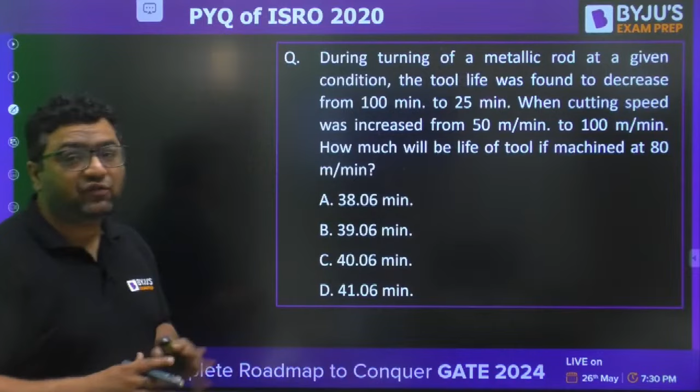Okay, moving further. So guys, we will be starting from this question. We are having all the questions of last year's ISRO paper. The very first question in front of you is from production. I will be taking care of theory of machines, machine design, production, all these subjects. Similarly, other faculties will be coming for other subjects, and the entire paper will be covered. So guys, let us start with the first question.

During turning of a metallic rod at a given condition, the tool life was found to decrease from 100 minutes to 25 minutes. By looking at this word tool life, you must have got an idea - that question is from Taylor's tool life equation. So 100 minutes to 25 minutes is the reduction when cutting speed is increased from 50 to 100 meter per minute. And they are asking how much will be the life of the tool at 80 meter per minute. By looking at the question, you must have an idea that it is the lower level of GATE questions.

Yes, so guys, this is the type of question which is coming in ISRO. And if you see the ISRO paper, this is the highest level of question which they have asked in production. Okay, yes, so very good.

I am giving you the formula V*T to the power n equals constant - this is Taylor's tool life equation. So as given, 100 minutes to 25 minutes, you can say T1 is 100 minutes, T2 is 25 minutes, and velocity V1 is given as 50 meter per minute, V2 as 100 meter per minute. So this data has been given to you. You can apply V1*T1 to the power n equals V2*T2 to the power n. From here you can find out the value of n.

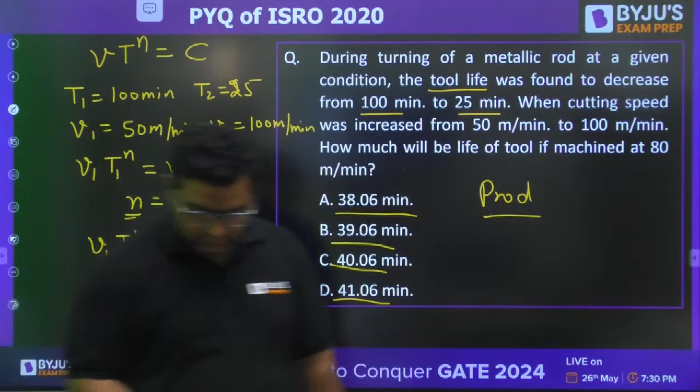Parth is saying the answer is going to be A. Okay, what about others? First tell me the value of n. Okay, now Parth is saying the answer to be B. First tell me what value of n you are getting, guys. Yes Ashrit, Ashok, Pajal word - what would be the answer? Guys, quickly tell me, quickly, I am waiting for your answer.

Very good, Parth. The value of n will be coming out to be 0.5. So when you solve, tool life will be coming out to be 39.06 minutes. So the answer for this question is going to be B.

Very good, guys. Moving to the next question. Very good, Prandtl word. So the answer will be B for this question.

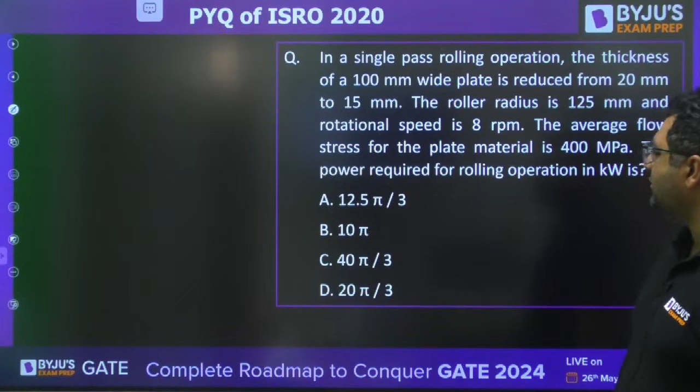So guys, there are some numericals, but majority of the questions are theoretical as well. This is a question from rolling, and this is also once again a question from production technology.

You can see the question: in a single pass rolling operation, the thickness of a 100 mm wide plate is reduced from 20 to 15 mm. So you can write H0 as 20 mm and H1, the final thickness, as 15 mm. So you can say delta H, the draft, is 5 mm. Then he is saying the roller radius is 125 mm, so you get to know R as 125 mm.

They have given the rotational speed as 8 RPM. The average flow stress for the plate material is 400 MPa. You need to find out the power.

I feel everybody would be aware that power can be written as torque into omega, and omega is nothing but 2 pi n by 60. Then you need to talk about the torque. And if you remember, torque in case of rolling operation, we have actually two rollers. So first of all, when we need to find out the power, because there are two rollers, generally power is given as 2 times T into omega.

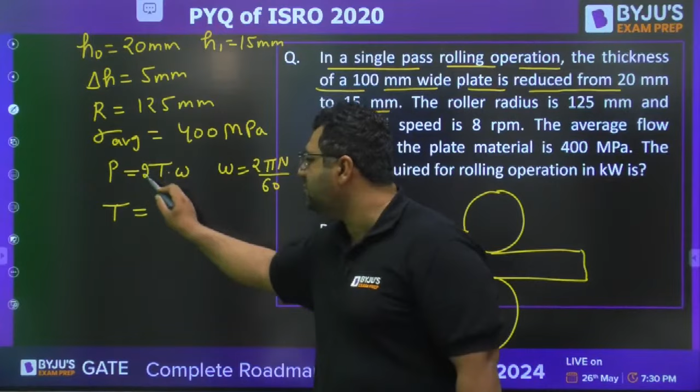So when we are talking about the value of torque, you are aware that if this is the center, the net roll separating force is passing at a distance of A from the center. So that is why we write torque equals F into A. This A is said to be the arm length, given as lambda into L, where L is the square root of R delta H. I feel everybody would be aware of this formula.

And you need to find out now what is the value of F. So when friction is not given, coefficient of friction is not given, you apply a very simple formula for this. Force is given as the average or mean flow stress into width into arc - the arc on which this roll separating force is acting. This is said to be L only. So it is once again B into L. The L formula is there in front of you. You will apply the formula, get F, get T, and then find out the power.

This is how you can solve it. I have given you the formula. Very good, Prandtl word. What will be the answer for this question? Solve it, guys, solve it. I want an answer from all of you. Parth, Prandtl, Ashrit, just solve it.

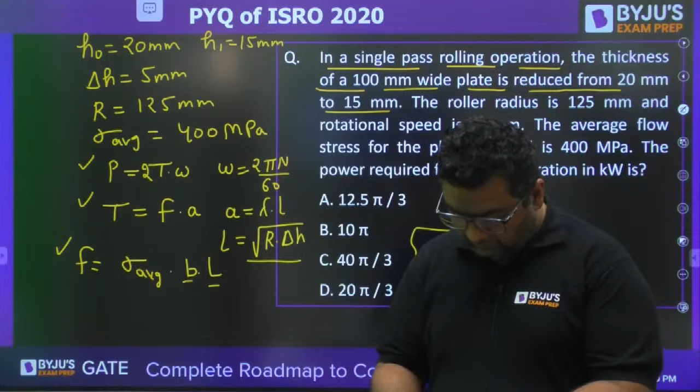So just try to solve it. Try to solve it. Everybody, what would be the answer, guys?

Okay, one by one we can find out. First of all, try to find out this force. You can see the width is given as 100 mm. So average stress is nothing but 400 MPa into width of 100 mm, and L value will be from R delta H. You need to just put these values and you will be getting the answer.

Okay, definitely Parth, calculate it. Actually, not more than 8 to 10 questions are of this type. All other questions are theoretical only. So 8 to 10 questions have this type of calculations.

So whenever you give the exam, try to do these types of questions at the end, which have heavy calculations. Solve the theoretical questions, one-liners, in the initial phase. Whenever you go for the first round of reading the paper, do the easy questions like that. After that, whenever you come to numericals, go for the numericals where you're aware of which formula will be used. And at the end, do those questions where you have lesser idea, or you are going to use some guesswork or intuition. Okay, so this is how you need to approach the paper.

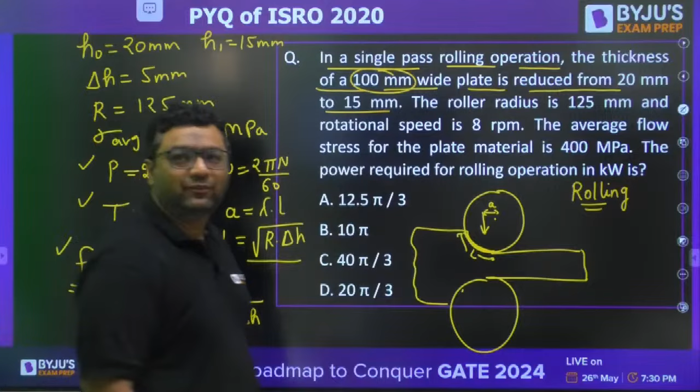Pejal word. Are we trying?

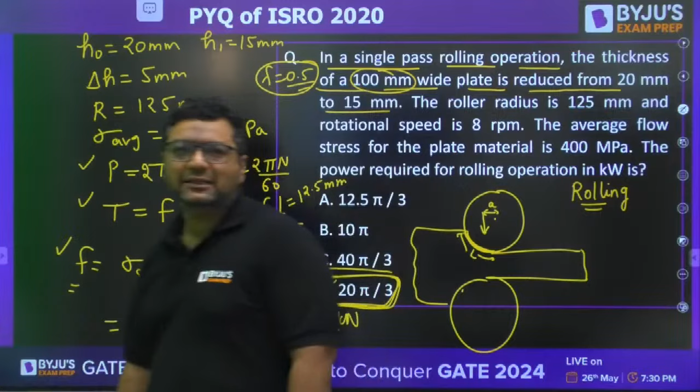Pejal word, okay, everybody is getting 40 pi, then maybe my calculations are wrong. Maybe this, whatever I have written, is the value of t into omega. When you multiply by 2, then you will get 40 pi by 3. Okay, then it's fine, whatever I calculated is t into omega. 40 pi by 3 is fine.

Or have I made it correct? Tell me that. I feel someone is a Dukhi Atma saying I am correct. So the answer is 20 pi by 3. Shall we lock it, guys? Lock it. Yes, D is correct, so 20 pi by 3 will be the right answer.

Moving further, now you can see easy questions are starting. So difficult, lengthy questions are over, and now easy questions are starting.

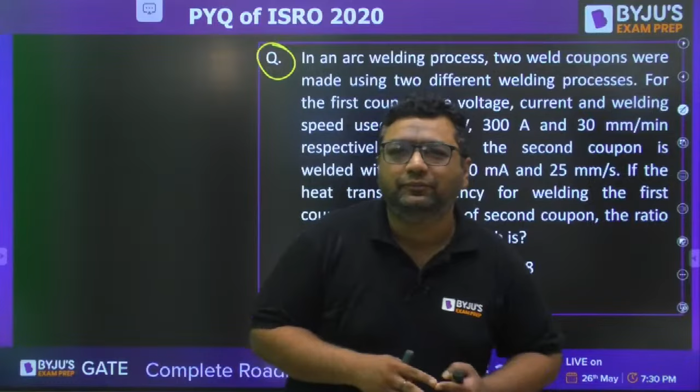Parts, if you remember when we are going for casting, this is a mold, this is the pattern. Whenever you want to take the pattern out, you apply forces using a wooden hammer. Because of this, the sand near the pattern moves away, and then you can take the pattern out very easily. This allowance is called rapping allowance because the cavity size has increased because of that.

Now the next question is from arc welding. In an arc welding process, two weld coupons were made using two different welding processes. For the first coupon, the voltage, current and welding speed are 15 volts, 300 amperes and 30 mm per minute. The second setup has 60 kilovolts, 200 milliamperes and 25 mm per second.

You need to see the units - here it is in minutes, here it is in seconds. If the heat transfer efficiency in the first coupon is half that of the second - so efficiency for welding in the first is half that of the second - you can write efficiency of 1 equals efficiency of 2 divided by 2.

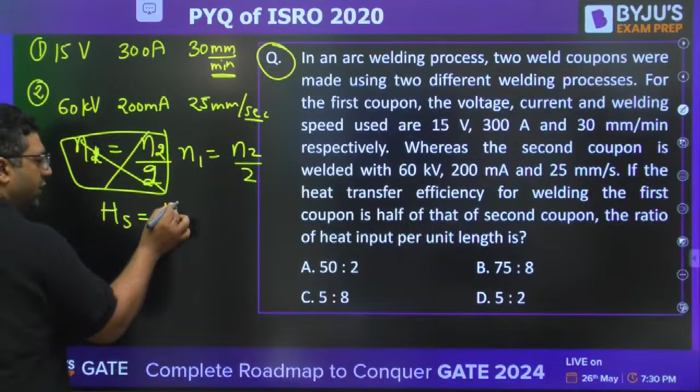Forget about this, I feel you know the formula for heat supply: V into I into efficiency divided by V. This is the formula for joules per meter, the heat supplied in units of joule per meter. So voltages are given, you just need to work it out.

They are asking you to find the ratio of heat input per unit length, so you need to find HS1 by HS2. The formulas are there in front of you. So V1, I1, efficiency 1 by V1, then V2, I2, efficiency 2 by V2.

Before putting in the values, convert this also into mm per second so that you get the right answer. Solve this question, it's very easy in front of you guys. Dukhi Atma, solve this and get the answer. Arnab, I am expecting the right answer from you.

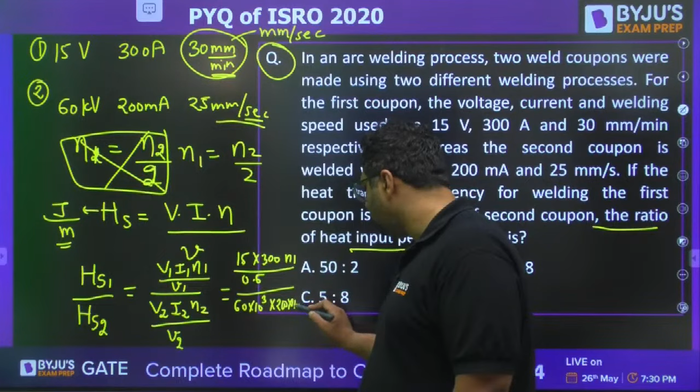V1 is 15, I1 is 300, efficiency of 1 is efficiency of 2 by 2 - keep it as efficiency of 1. V1 is 30 mm per minute, we will divide by 60, it will be 0.5, divided by - second data is 60 into 10 to the power 3, then 200 into 10 to the power minus 3.

Efficiency of 2 is 2 times efficiency of 1, divided by 25. Pajan and Parth are saying D will be the answer.

Yes, Dukhi Atma, what is the answer? Tell me. Parth and Pajan, have you converted that into mm per second? When you do that, 30 divided by 60 gives 0.5 mm per second. Have you done this? Please tell me, please confirm yaar, at least be interactive. If you have made some mistake, we will rectify this.

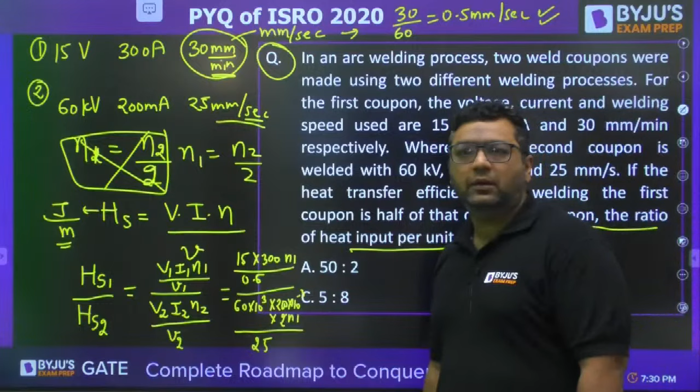Okay, but the answer is what Dukhi Atma is saying - B, this is the right answer. And this is from the ISRO keys, I have also solved it, and 75:8 is the right answer. So Parth and Pejal, you have made some calculation mistake, but don't worry, this is not the final paper, this is the place where we can improve. You need to see where you are making the mistake, so in calculation you need to work more.

As I said, these types of questions are very less in number. To make it more interesting, I have kept these questions first. Otherwise, majority are theory questions.

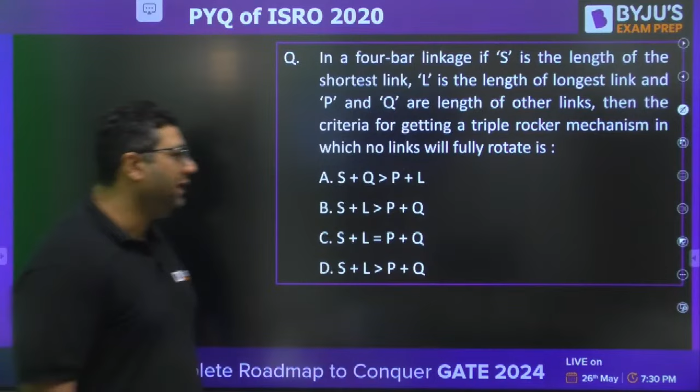This is a 4-bar linkage theory of machines question, based on Grashof's law. Let us see how many of you give the right answer. I already told you, this is a very important law, it comes every year in the paper. But before you answer, notice they are talking about triple rocker or double rocker. So whenever you have double or triple rocker, what should be the condition you must be aware of?

Very good, yes. What will be the answer for this? Mind it, they are asking about triple rocker, but you can consider it as double rocker. For double rocker, what would be the answer?

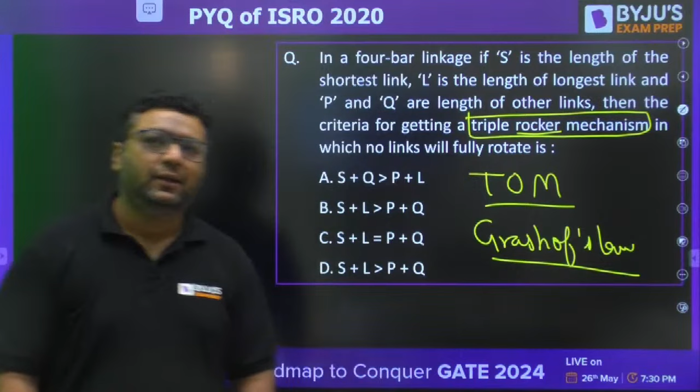Very good. So the answer will be this, because for double rocker or triple rocker, the Grashof law condition shall not be satisfied. Grashof's law says that if S plus L is less than or equal to P plus Q, you will get at least one crank. When you get one crank, the mechanism cannot be double or triple rocker. So to get double or triple rocker, we need that law to not be satisfied. So answer B is the correct one. Here the law is satisfied, so it's wrong. Here the things are not written in the proper way.

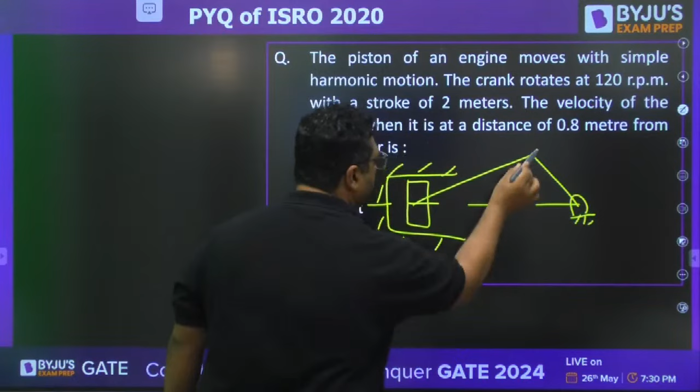Moving further, the next question is from kinematic analysis of single slider crank mechanism. The piston of an engine moves with simple harmonic motion. This is a cylinder, this is a piston, with connecting rod and crank given. They are saying that the crank rotates at 120 RPM.

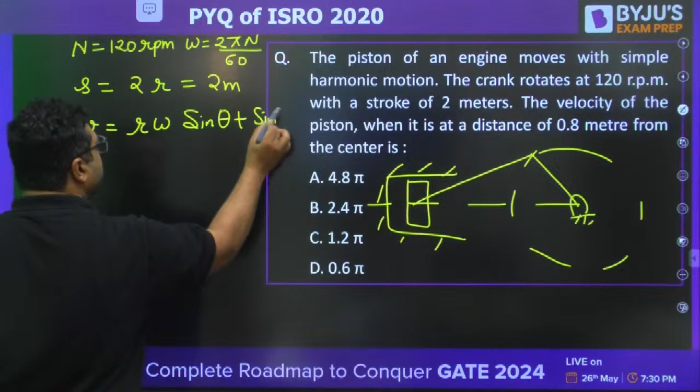N is 120 RPM, from that you can find out omega as 2 pi N by 60. Then, with a stroke of 2 meters, since they have already mentioned the stroke of 2 meters, stroke can also be written as 2 times the radius of crank, which is given as 2 meters. So radius will be 1 meter. The velocity of the piston is r omega sine theta plus sine 2 theta upon 2n, if you remember.

But they have not mentioned L and R directly, they have said it is at a distance of 0.8 meter from the center. So they have not mentioned anything about L and R. R we know is 1 meter, but L is not known to us. So without that we cannot move ahead because n is not known. For such a case we will say n is very, very large, so this term will be neglected. So we just need to find out theta now.

Now, as n is very, very large, when you write the formula for displacement, if this is the extreme position, and this is the movement of piston X, the formula is X equals R into 1 minus cos theta, plus n minus square root of n square minus sine square theta. Since n is very, very big, in place of n square, sine square theta will be ignored and n will get cancelled out, so this entire term becomes 0. So you get the answer as X equals R into 1 minus cos theta.

And as they have said 0.8 meter from the center, you know from here to here the total is 2 meter stroke length. Then if we talk from the center, this should be 1 meter. And they have given it as 0.8 meter from the center.

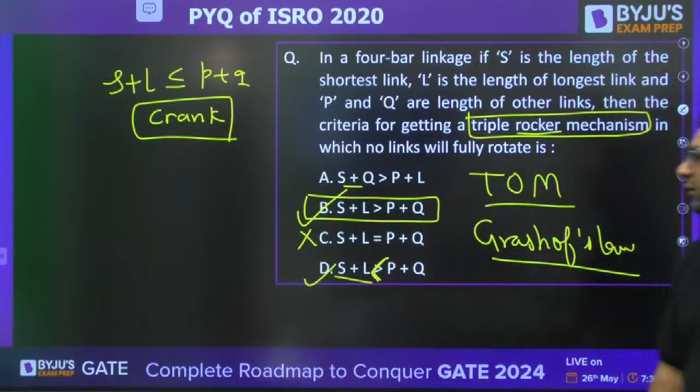Dukhi Atma, actually that is a misprint. B will be the right answer because in ISRO it is MCQ only. So D was a misprint, don't worry. In the previous question, D and B both are same, so you can say both are correct. It was a misprint actually, here a less than sign will come. Then it will become wrong. Solve this question, guys.

Yes, Pagel word, are you giving the answer for this question as A? Solve it properly, guys. I have seen in calculation type of questions, you guys are not giving the right answers.

Dukhi Atma, be fast. 4.8 pi, 2.4 pi, 1.2 pi, what will be the answer?

Arnab, where are you? Next question is from Coriolis component. Tell me the value of cos theta.

Ha, Parth, but note it. The point is, if you are able to make 70-80% of questions correctly, no need to go for any such question where you have doubt. Can you tell me from here what is the value of cos theta?

Cos theta, this is R is 1 meter, 1 minus cos theta. What will be cos theta? Cos theta will be... very good, Dukhi Atma has given the right answer.

Yes, 2.4 pi will be the right one. Pagel word, once again you have made the mistake. You can see it, 0.2 is R into 1 minus cos theta. 2 times of R is 2 meters. So R will be 1 meter. So from here you will be getting the value of cos theta as, you can say 1 minus 0.2. So you will be getting from here cos theta is 0.8.

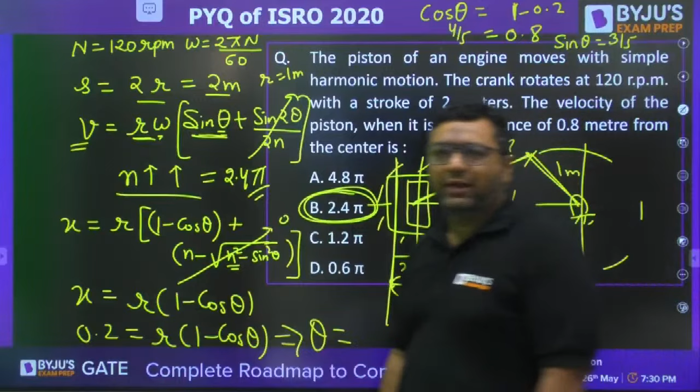B is correct. Very good, Ashrit. Very good, Ashrit. So, okay, sin theta is 0.6.

I feel I have done it correct. Yes, cos theta is 4 by 5, sin theta is 3 by 5.

Answer is 2.4 pi. Arey bhai, this is 0.2 na? X is 0.2. R is 1 meter. 1 minus cos theta. When cos theta will be going there, you will be getting 1 minus 0.2. Okay, so I have written it correct only. B is the right answer.

Very good, Dukhi Atma. Now you got it. Pagel, now you got it, your mistake. Very good. So Parth, you guys are getting one more chance.

A block slides outward. I am making the figure for this. This is the block. A block sliding outward on a link at a uniform rate of 30 meter per second, while the link is rotating at a constant angular velocity of 50 radian per second. They are asking you Coriolis component.

I feel everybody would be remembering the formula. Coriolis component is 2V omega. Solve it and get the answer, guys.

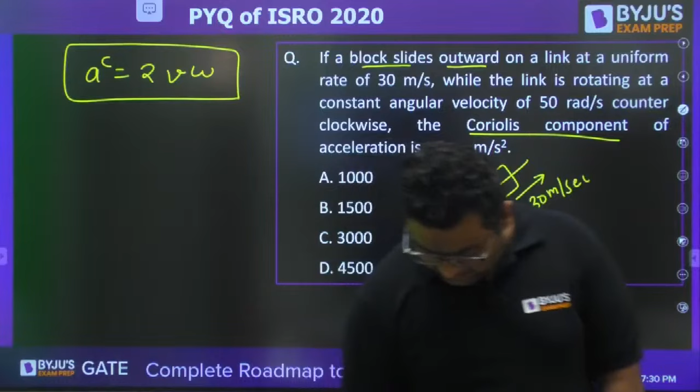Parth is saying C. Pagel word is saying C. Very good. So that's what I said.

If some difficult questions are there, some very easy are also there. So when you are going to make the paper, the first time you will make all easy questions which you are answering just by looking at it. Then you will go for those numericals which you know, which are very small, like this type of numerical. At the end you will go for the numericals like you have seen last one, like you have seen welding numerical, like you have seen forming numerical.

Very good. Everybody is giving the correct answer here. C is the answer for this. When you will put it, you will get 3000 meter per second square. Because omega is directly given as 50, velocity is 30, so answer will be 3000.

Moving to the next question, very easy one. Look at it.

Every question is not difficult and every question carries the same marks. This question will give you the same marks as the previous one. So why choose the difficult question and make our journey harder? Answer this, I feel everybody will give the right answer.

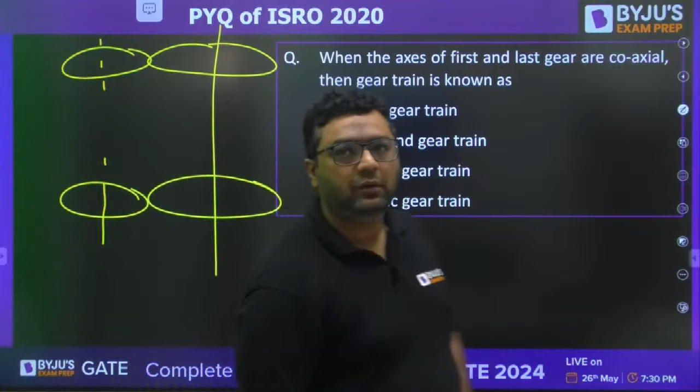When the axis of the first and last gear are coaxial, this is the axis of the first gear and this is the axis of the last gear. When the axes become the same, which gear train is this? Yes, it is a reverted gear train.

Wonderful, guys, wonderful. Ashrit, got it or not? Arnab, got it or not? Parth, very good, very good.

Moving to the next question, guys. This question is from Gyroscope. You've seen many questions like this in theory of machines. You know for gyroscope the couple is I omega omega p, and you need to find the value of omega p. They have given omega as 20, torque as 100 Newton meter meaning couple is 100 Newton meter, and I value as 1 kg meter square. So just find omega p using the simple formula. They are not even asking about direction. What will be the answer to this question, guys?

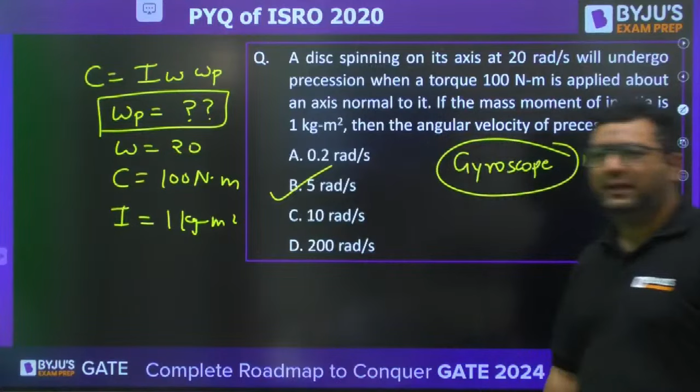Very good, very good. All of you in one word, B is the answer. Very good, Pejal, Dukhi Atma, Parth Patel. B is the right answer. Moving further.

This is once again from theory of machines. Which of the following mechanisms provides intermittent rotary motion? Intermittent. Yes, for intermittent motion, only one name is famous. Which mechanism is used for intermittent motion? Theory of machines, lower pair mechanisms.

Very good, Dukhi Atma. What about others? Ocean, very good. Pejal, very good. This is Geneva mechanism. This question has been asked in engineering services many times. I told you that these types of ESE questions are getting repeated in ISRO, that's why I said previous year questions of ESE are important.

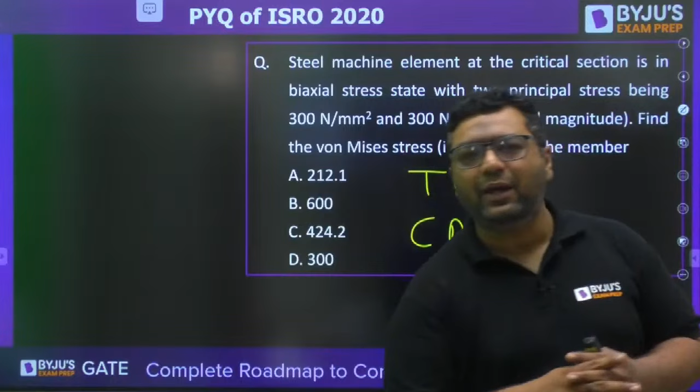Steel machine element at the critical section is in biaxial state of stress. Biaxial state of stress means this: if this is sigma xx and this is sigma yy, with no shear acting, it becomes sigma 1 and sigma 2. He is saying sigma 1 and sigma 2 are 300.

So I feel you are aware of von Mises theory: sigma 1 square plus sigma 2 square minus sigma 1 sigma 2 equals SYT square. So you need to find the value of SYT. Solve it and get the answer. I have given you the formula, this is for von Mises theory.

Theory of failure is a machine design topic. For civil people, theory of failure comes in SOM (strength of materials), but for mechanical people it's in machine design. In reality, it should be in machine design only since it relates to design, but we study it in SOM because it has application with principal stresses.

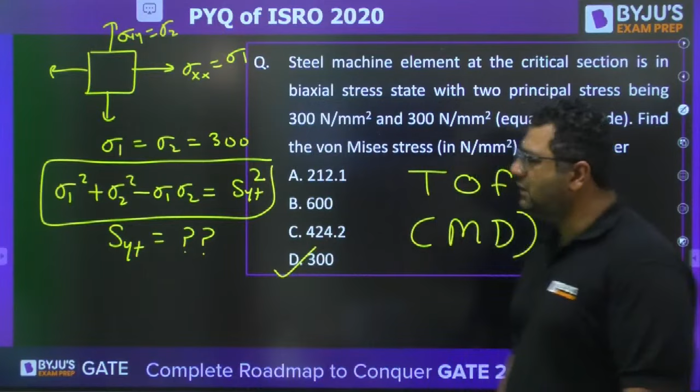Very good, everyone gave the right answer. 300 is correct, because when you put the value 300 squared minus 300 squared, one 300 squared term gets cancelled out. So the answer is 300. Next question is once again from theory of machines.

They are asking about the natural frequency. For that, first find the equivalent stiffness. You know we can also represent it like this: K1 and K2 in series, so that can be written as 1 by K equals 1 by K1 plus 1 by K2. So this K becomes K1 K2 by K1 plus K2.

Now this and this are in parallel. You can find out K equivalent, and omega n will be given as root of K equivalent divided by mass. Solve it and get the answer.

They have mentioned the value K1, K2, K3 as 4, 4 and 8. So they are equals to 4. 4 cross 4 by 4 plus 4. This is K3 is 8. So now, 4 plus 4 is 8, 4 into 4 is 16, 16 by 8 is 2. So now K equivalent is 10, that is 2 plus 8.

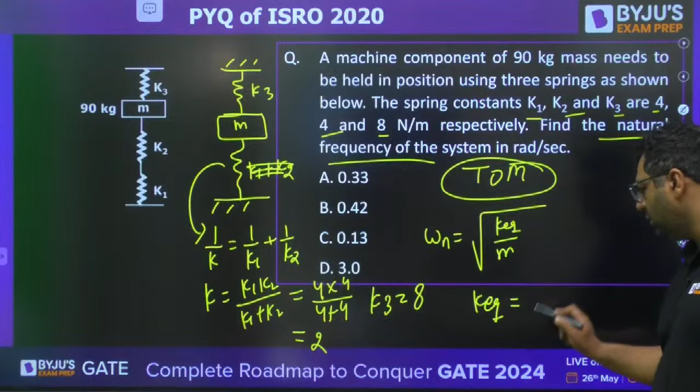Solve it and get the answer, guys. Mass is given as 90 kg. What will be the answer for this?

What will be the answer for this? Very good, very good, very good. 0.33 is correct.

A is the right answer. I feel you have made the mistake. When this is 10, mass is 90, so what will you get here? root of 10 by 90 is 1 by 3, and 1 by 3 is 0.33. Very easy question. Very good, Ocean. Wonderful.

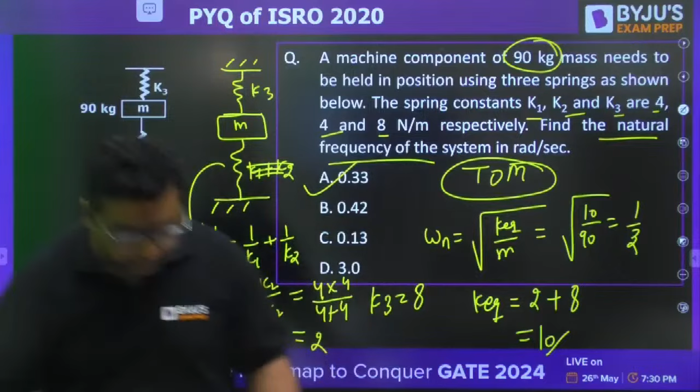Moving further, guys, the next question is this. A metal alloy machine component is subjected to fluctuating tensile stresses from 100 to 200. The material has yield and endurance strength as given. Find out the factor of safety. As they have given the yield strength and endurance.

What is yield? They have mentioned it as 450. Endurance is 200. So whenever they are giving this, we can go for Soderberg criteria, because Soderberg needs these two things. So you know what we can do now?

For Soderberg, sigma mean by SYT, sigma amplitude by SE is equals to 1 by N. You know sigma mean is maximum plus minimum by 2, that is 100 and 200. And sigma amplitude is maximum minus minimum by 2. So maximum is 200, minimum is 100. Just put the value and get the answer, guys.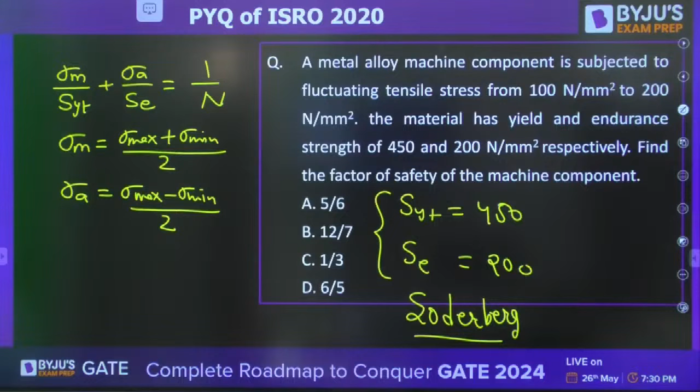Put the value and get the answer, guys. Solve it. Solve it, guys. Yes, Dukhi Atma, what will be the answer?

Okay, Parth is saying 12 by 7. Dukhi Atma is also saying 12 by 7. And I would like to say that 12 by 7 is correct. So the answer for this will be 12 by 7. Maximum plus minimum by 2 is 150. Maximum minus minimum by 2 is 50. Putting the value, you will get 12 by 7.

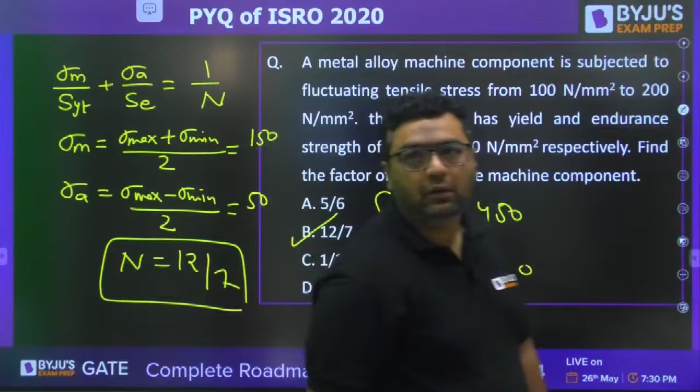Very good, guys. Dear Dukhi Atma, it will be offline. Till now, they have mentioned it to be offline. Okay, ISRO is always taking offline exam, that's why the paper is available.

So a diver of mass 100 kg standing at the tip of a springboard of negligible mass. The natural frequency of the springboard with the diver is 1.6 Hertz. What is the static deflection at the tip of the springboard when the diver is standing at the tip? So the point is, omega n is equals to square root of g by delta.

They have given frequency in Hertz. So 2 pi Fn is equals to g by delta. So delta is unknown, you need to find out delta. This is Rayleigh method of vibrations. This question is from vibration.

Sir, engineering maths is there. Yes, Parth, actually till last year's every year maths is coming, and maths in this paper have 7 questions. Okay. Yes. Solve it, guys.

Solve it, solve it, solve it. Solve this question, guys.

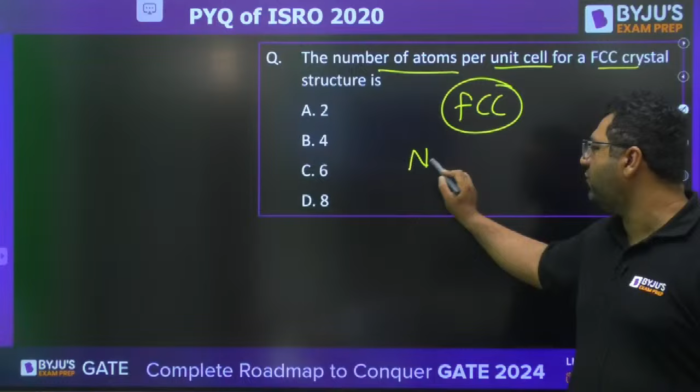Hydrogen bonding. Next, the number of atoms per unit cell for FCC - the average number of atoms. Corner atoms contribute by 8, face centered by 2, body centered by 1. What will be the answer? Very easy question, FCC and BCC we have done in detail.

This is from material science of GATE syllabus. Parth Patel is saying 6. Think and answer, yaar. For FCC: corner atoms 8 by 8, face centered 6 by 2, body centered 0. What will be the answer?

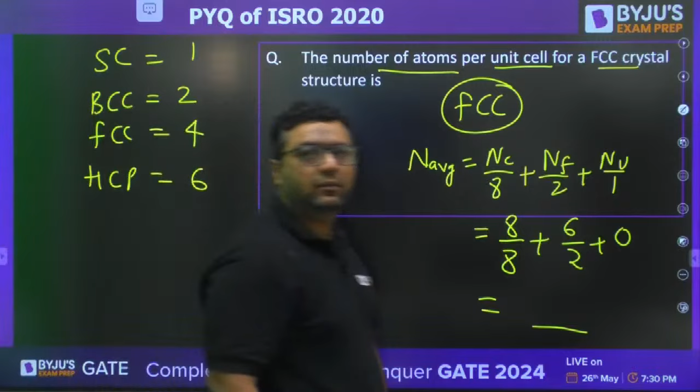Yes, 4. For BCC, the average number of atoms is 2. Simple cubic is 1, FCC is 4, HCP is 6. Okay, moving further, next question.

So they are saying in a 2-component system, the non-compositional variable is only temperature. Okay, so it means you will use the Gibbs phase rule: P plus F equals C plus 1, because only one thing is variable. You need to find out the number of degrees of freedom.

In the case of a single phase, P value is 1, plus F. They have already mentioned it's a two component system, so C plus 1 is 2 plus 1. Find out the degree of freedom - very easy question, Gibbs phase rule.

Dukhi Atma, actually C plus 2 is used when temperature and pressure both are variable, as in thermodynamics. In material science, pressure is constant, atmospheric, so that is why only temperature is unknown. So the formula becomes C plus 1. C plus 2 is in thermodynamics where temperature and pressure are variable; here only temperature is variable.

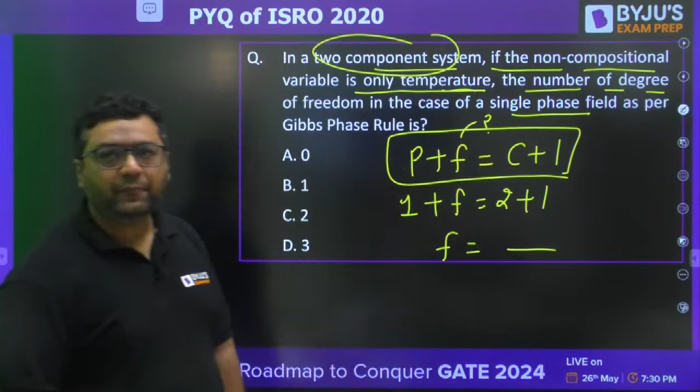Okay, so the answer for this will come out to be 2. So guys, P plus F equals C plus 2, where 2 is for temperature and pressure. But P plus F equals C plus 1 in material science, because here only temperature is variable - pressure is known to us.

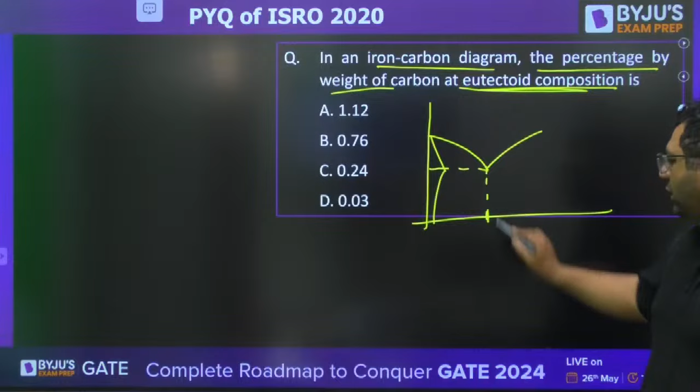Great, moving further. In an iron carbon diagram, the percentage by weight of carbon at the eutectoid composition - if you remember, when we are talking in the steel region, then this is what they are asking. Eutectoid point. Up to 2% is steel.

Tushar is saying B is the answer. Very good, very good, Dukhi Atma. B is the right answer - 0.76. So you can see these are the questions which will make you clear the ISRO exam.

So these type of questions are going to help you. Okay, so not every question needs to be attempted - some are to be left as well. This question is easy to attempt though, very easy question once again from material science.

Out of these phases, which of the following is the hardest: martensite, pearlite, bainite and spheroidite?

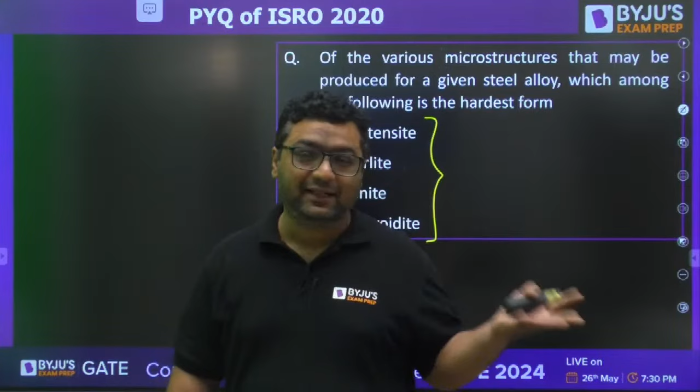Dukhi Atma, material science is a high weightage subject. Thermal part, your favorite due to Sodhu sir, is high weightage too. Like when Chandra sir comes, he will be having a large number of questions. Engineering services follows these trends - ESE takes more questions from thermal, so ISRO also takes more questions from thermal. You can say 40 to 45% weightage to thermal, and in design and production part, more weightage is dedicated to material science and strength of materials. Lesser weightage towards production compared to the GATE paper.

Okay, martensite is the more brittle one. Very good.

Next, which spring steel is widely used in aircraft engines? Now I know 99% will not be able to answer this question, because these type of things are mugging up kind of facts, so not everyone will know this type of question.

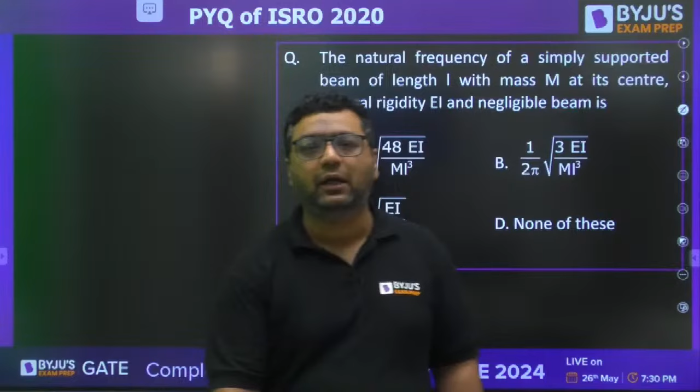Just solve this question, guys. Just solve this question.

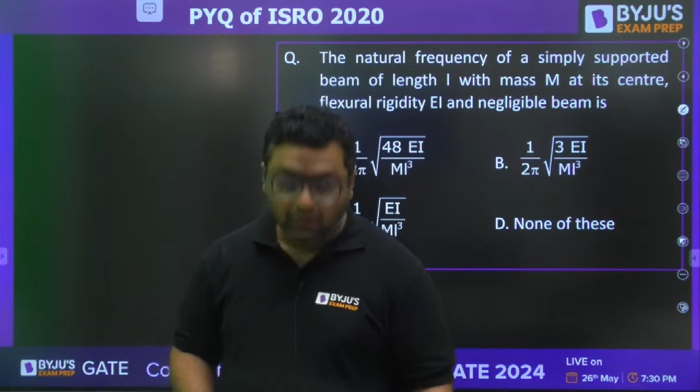Solve this question, guys. The natural frequency of a simply supported beam of length L with mass m at its center. At its center we have mass m, so mg will be the weight, and flexural rigidity is EI.

So you know that for this, what is the deflection? Deflection here is, if this is P, PL cube upon 48 EI, and P will be mg. So you know Rayleigh's method says this is g by delta naught, the static deflection of mass. Keeping that in mind, you can answer, and if you want Fn, you shall write 1 by 2 pi root of g by delta naught.

Very good, very good, very good, Dukhi Atma. Soon you shall be Sukhi Atma. Yes.

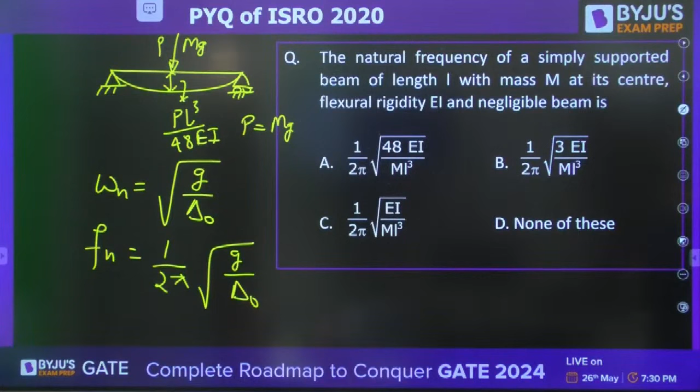What will be the answer, guys? Just by looking at the options, you can answer it. Only one option matches with the data. Yes, everyone. Do like and share the session, guys.

Dukhi Atma, what will be the answer? Fn equals 1 by 2 pi root of g by delta naught, this is the static deflection of mass.

So when you do this, the answer will be A. Because when you put it here, mg L cube upon 48 EI, A will be the right answer.

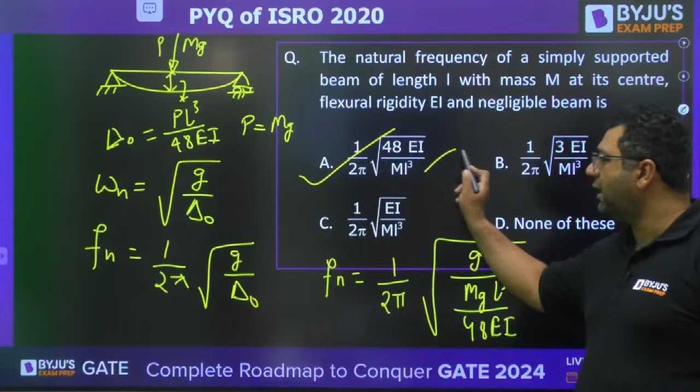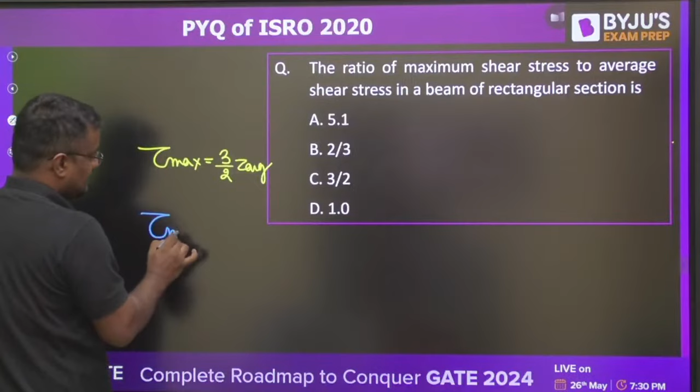So the maximum shear stress in a rectangular section is 3/2 of tau average. So what are they asking? They are asking what is the ratio of tau max by tau average. So this is 3/2, and guys, this 3/2 is same for triangle and rectangular sections. Here the tau max is 3/2 of tau average, for circular it is 4/3 of tau average. Thank you, now the next question.

The maximum bending moment at mid-span is asked. Let this be RA, let this be RC. Guys, moment about any point has to be 0 for equilibrium. I'm not saying bending moment may or may not be 0, but moment will always be 0 at every point. So from here, RA into 2 clockwise, then 4 into 1 downward load will produce an anti-clockwise moment, 4 into 1.5, that is 6.

So RA value is equal to 3 Newton or kilonewton, whatever. Have you got this? Everyone, please let me know. Come on, have you got this?

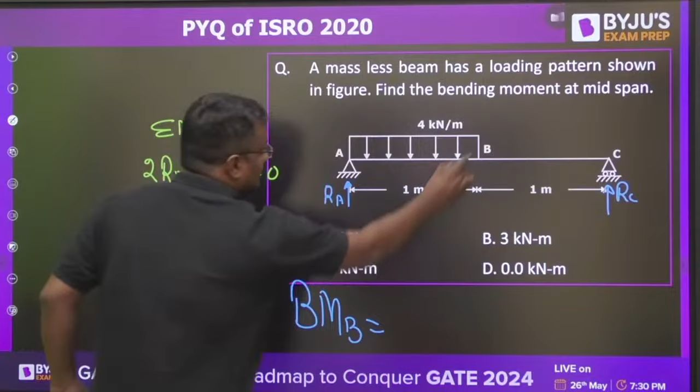Now, if I want bending moment at B, see from left hand side, applying the sign convention of bending moment, RA upward load positive, 3 into 1, minus this total load is 4 into 1 is 4, acting at center of mass, that is 0.5. So 3 minus 2 will be 1. A option, yes.

Excellent. Next question. Cylindrical pressure vessel, diameter is given, thickness is given. And if there is a cylindrical pressure vessel and the gas is inside, these members will be stressed. Now, what is it subject to internal pressure?

Hoop stress is PD by 2T, and axial means longitudinal stress, that is PD by 4T. Now pressure is given, diameter is given, thickness is given, everything is given. Just you have to put the values. So this will be D option.

Have you got it? See, we want PDT, so pressure is given, diameter is given, and thickness is given. Now don't want to waste time here, let's just go to the next question.

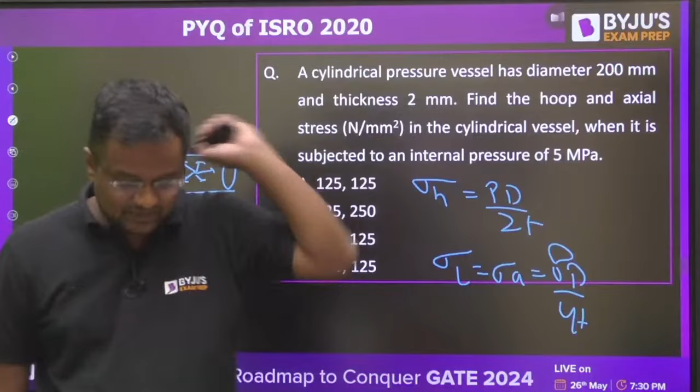Any doubt here you can ask me. Come on. After me, Chandrasekhar sir will be here.

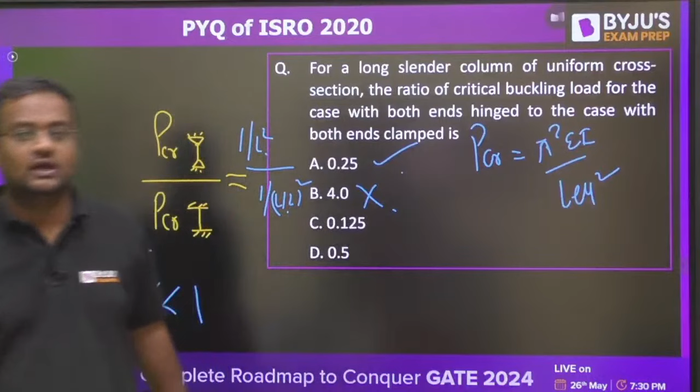Now next question. If the length of the column subjected to a compressive load is increased by 3 times its original length, the critical buckling load becomes - PCR is equal to pi square E I minimum upon L effective square. In fact there is N square also, N is the number of buckling loops. In your case, N is 1, you always study with N equal to 1.

Okay, number of buckling loops are 1. But if the column is something like this, the number of buckling loops can be 2 also, so then the formula has 2 square. In your syllabus you only study with 1 buckling loop, so N is equal to 1, that's why you don't study this. Now, from this formula, you know that PCR is proportional to 1 by L effective square.

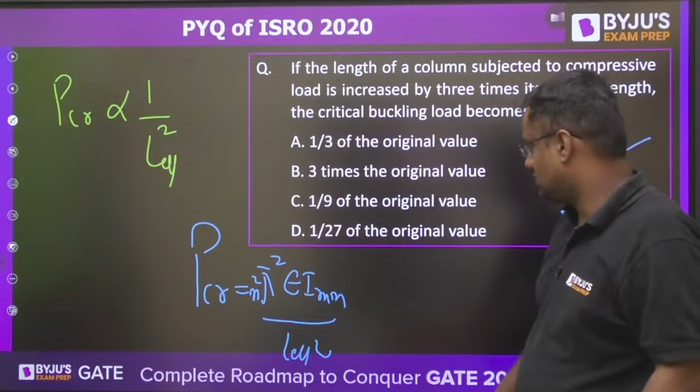And length is changing how much? Increased by 3 times. So it will be 1 by 9. If length is increased by 3 times, the critical buckling load becomes pi square EI upon L effective square, so 1 by 3 into 1 by 3, that's 1 by 9.

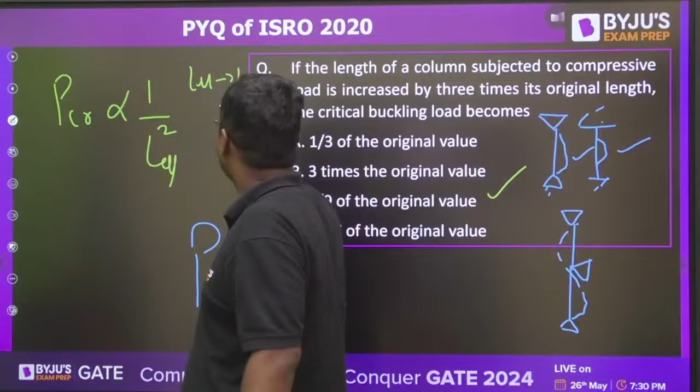Now you will say, sir, it may not be hinged, because for hinged, L effective is L. Guys, for others also it is L by 2 or L by root 2, whatever. So if L is changing by 50%, L effective is also changing by 50%. Whether L effective is L, L by 2, or L by root 2, if it changes by a certain percentage, L effective changes by the same percentage. Got it?

Got it? Yes, excellent.

Now the next question. A square bar of size 10 mm into 10 mm, and length is this. Now it's subjected to a 200 Newton tensile force. Modulus of elasticity is 200 gigapascal.

Now, what is the strain energy density? Guys, strain energy density means strain energy per unit volume. Strain energy density is strain energy per unit volume, which is the area under the stress-strain graph. If you remember, I derived this many times before.

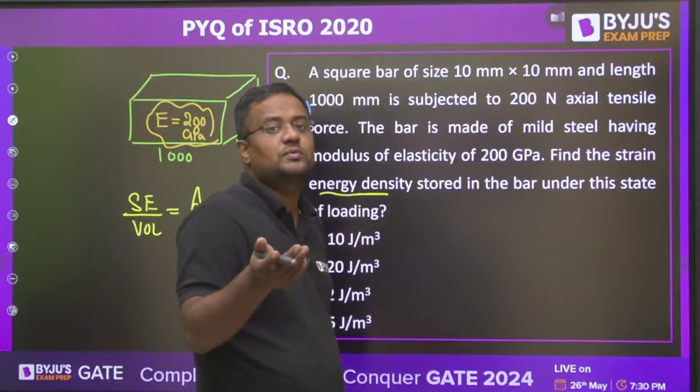Unless mentioned, we always assume the material to be homogeneous and linear elastic.

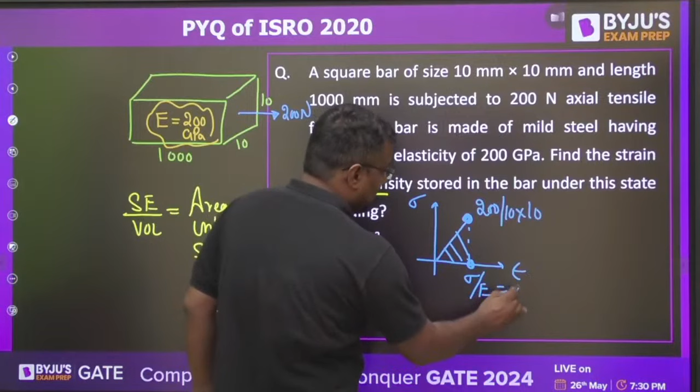So how much is the stress? 200 by area, this value we are applying load up to here, 200 by area, 10 into 10. Corresponding strain will be sigma by E, strain is stress by Young's modulus. So sigma by E, that is 200 by 10 into 10 upon 200 gigapascal. I am not converting units, you can convert them here. So if you solve this, the answer will be option A.

I am not going into the units. Have you got it? Everybody give me yes or no, or otherwise ask a doubt here.

Why is strain energy per unit volume the area under the stress strain curve? Why is strain energy the area under the P delta curve? Everything I told you in class. You can see my videos on strain energy also.

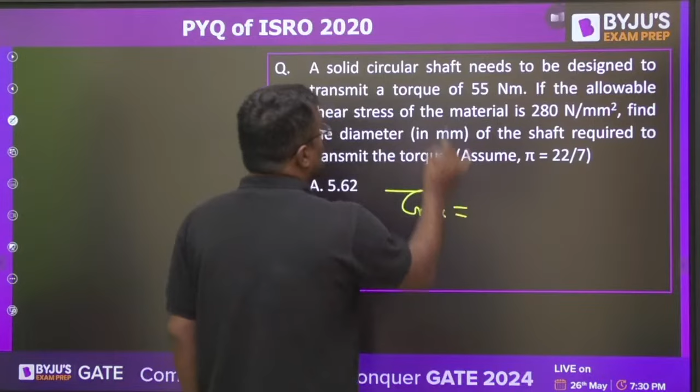Now, a solid circular shaft needs to be designed to transmit a torque of 55 Newton meter. If the allowable shear stress of the material is 280, find the diameter. Guys, the maximum shear stress for a solid circular shaft, not for all, is 16T by pi d cube.

So d cube is 16T by pi tau max. Pi value you know, this is tau max, this is T, everything is given, you have to just calculate this. Can you do this, guys?

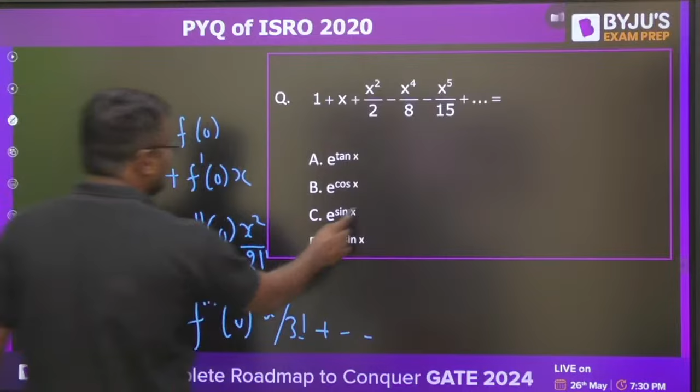And when you put e to the power sin x as f(x), e to the power sin x is equal to f(x), and you apply this, you exactly get this term in just a single step.

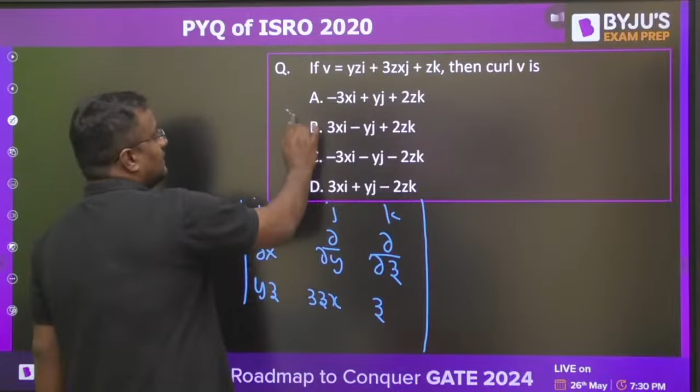Now the curl is asked. So curl is i j k, del by del x, del by del y, del by del z, into the coefficients: yz with i, then 3zx, then z - yz plus 3zx and then z. In a single step, guys, you can find this out: i multiplied by this, minus j multiplied by this and this, k del by del x of this minus this, you will get option A. I guess you all know this.

Now, in a continuous differentiable function, the gradient of a scalar function - then the curl is... zero. Always in a function which is continuous and differentiable, the gradient of the scalar function, you will do the same steps and it will come as 0. Everybody just tell me, have you understood this?

Everybody just tell me, have you understood this? Please.

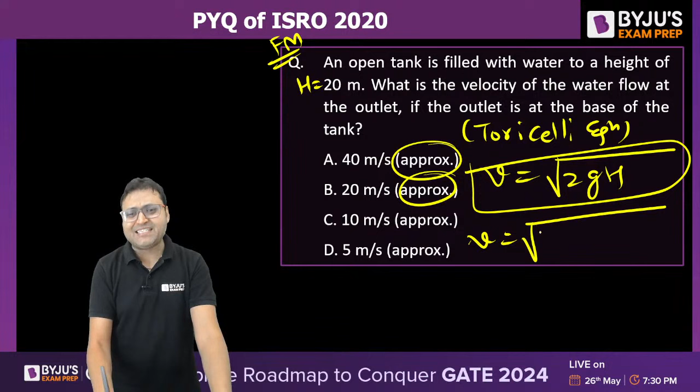So what is the answer? If you take G as 10, since it is approximate, then 2 into 10 into 20 gives 20 meters per second approximately. B is the right answer. Well done, good, good, good. That is the difficulty level of the question you can expect in ISRO - very simple, very straightforward. So the most important strategy is to revise all subjects thoroughly and memorize the standard formulas so you can solve questions as quickly and accurately as possible.

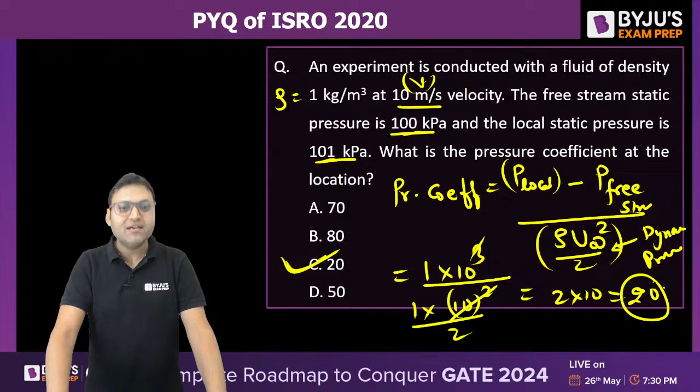C is the very nice Pejal. Dukhi Atma, well done. Where did you go? I was seeing you, you were there from the beginning of the session. Good, good, good. Hi Rohit, welcome to the session. Please do solve the questions quickly and accurately.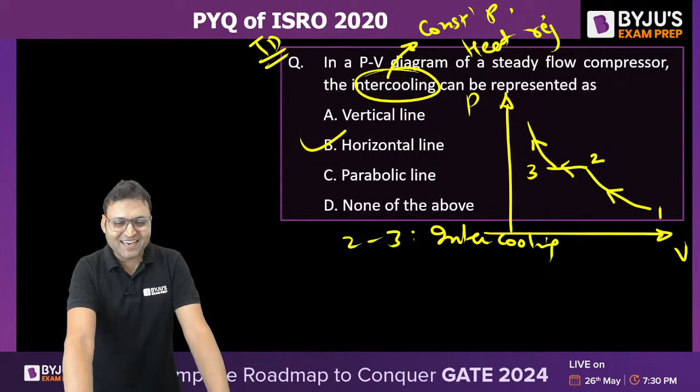Yes, Tushar, well done. Pejal, Dukhi Atma, good, good, good. Where do you all bring such names from?

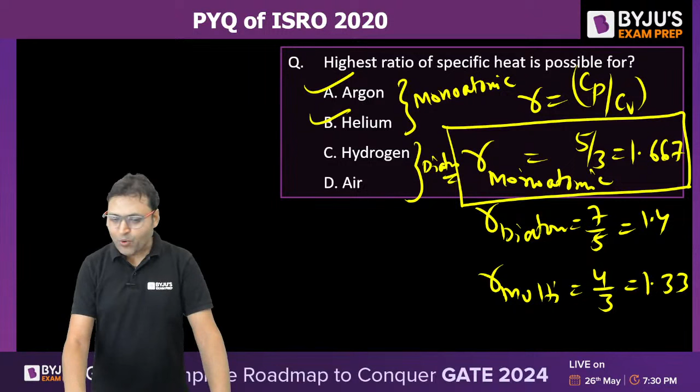Argon is monoatomic, helium is monoatomic, hydrogen is diatomic, air can also be taken as diatomic because nitrogen is in bulk quantity. So A and B both will be the correct answer. Yes, Tushar, well done. A and B both can be taken as the right answer because both are monoatomic gases, and these are diatomic. So option A and B both can be treated as correct for this question.

Shall we proceed further now? Anybody having any doubt, you can just let me know. It is a theoretical question, but you should understand the significance of each and every relationship here.

Let us move to the next one. This is question number 10. This is question number 11. I am having around 18 questions in total. We are at question number 11. After me, Suraj sir will be taking over and he will discuss the questions from heat transfer, industrial engineering and engineering mechanics. I think these are the only subjects left out; rest have already been completed by Dheeraj sir and Abhinav sir. I will be going to complete fluid mechanics and thermodynamics and its applications.

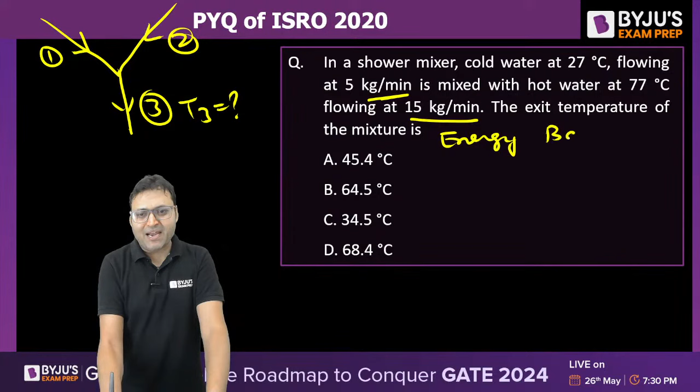According to the energy equation, if we write the energy balance equation, M1H1 plus M2H2 is equal to M3H3. Or per unit time, using mass flow rate: M dot 3 will be equal to, from mass conservation, M dot 1 plus M dot 2 is equal to M dot 3.

So M dot 1 is 5 kg per minute, H1 is Cp into T1, plus M dot 2 that is 15 kg per minute, Cp into T2, is equal to M1 plus M2, that is 20, into Cp into T3. T3 is to be calculated.

Cp gets cancelled out. So 5 into T1, where T1 is 27 degrees Celsius, plus 15 into T2, where T2 is 77 degrees Celsius, is equal to 20 into T3. You can easily solve for T3 in degrees Celsius. Your answer will be in degrees Celsius.

What is the answer for question number 13? Are you getting 64.5 degrees Celsius? So guys, you should be ready, you should be ready to do hard work.

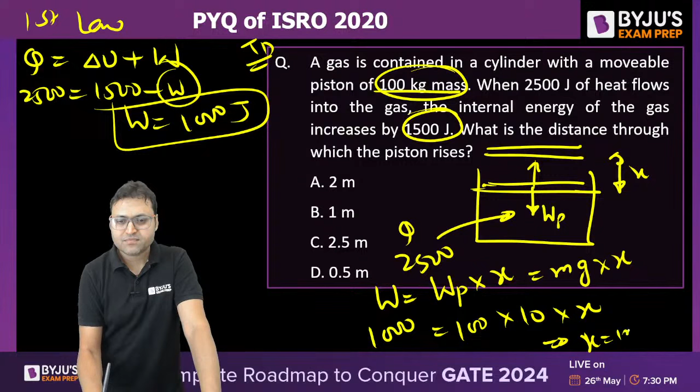So work done is 1000. M, mass of the piston, is 100 kg. Let me take G as 10, into x. So x is equal to 1 meter. 1 meter, isn't it? The next one.

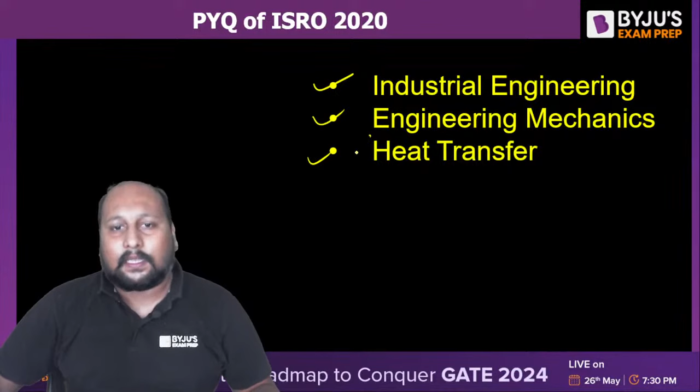Now if I talk about ISRO perspective, heat transfer is an important subject because 7 to 8 questions are expected. Industrial engineering is very easy, 1 or 2 questions. Mechanics also has 1 or 2 questions from this particular subject. So let us, without wasting time, let's start. Are you ready? All good?

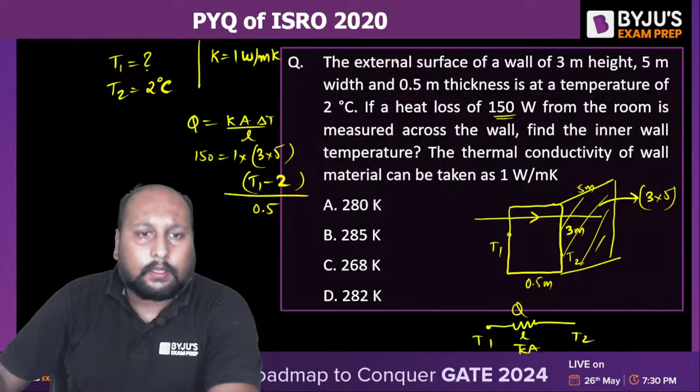T1 we need to calculate, T2 value is 2, divided by the thickness which is 0.5. So solving this, 150 is equal to 3 into 5 into T1 minus 2, divided by 0.5. So what's the value of T1 quickly? I don't think you should be taking much time.

Very good. Dukhi Aatma, you all have given very unique names. Dukhi Aatma, crazy word - we are having unique names today.

So T1 is equal to 2 plus 150 into 0.5 by 3 into 5. This is 7 degrees Celsius. Okay, but they're asking in Kelvin, so plus 273, that is 280 Kelvin is the final correct answer. Option A - 7 degrees Celsius is the answer that we are getting, 280. Very good, Shaker, very good.

All the unique names we are having. Alright, is this clear? All good. Can we go with the next problem?

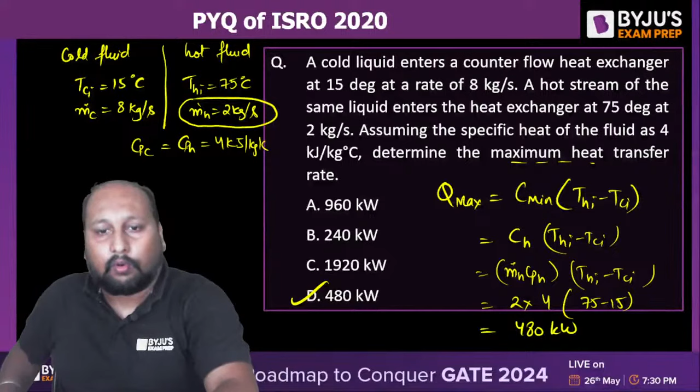Quickly. It's a CBT, computer based test. Aspirant, it will be a computer based test only. Let's go quickly.

You need to find the value of the wavelength corresponding to the maximum power, and they are giving you the temperature. So we have to convert the temperature. This is 273 plus 17, that is equal to 290 Kelvin. So we can say lambda into T, we have to apply Wien's displacement law, which gives 2898 micrometer Kelvin. So lambda equals 2898 divided by 290.

Normally you can also take this constant as 2900. We can write lambda m into T is approximately equal to 2900 micrometer Kelvin, which would give you exact 10. If you are taking 2900, your option C will be the exact value, but we should not go for any approximation - 2898 is safer. So 9.999 something, option C is the correct answer, 10 micrometer.

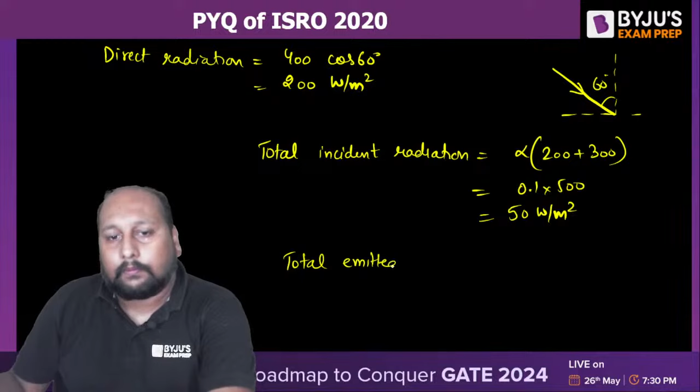Now we have to identify what is the total emitted radiation. That is equal to sigma into T1 to the power 4 minus, or surface, to the power 4 minus ambient, or sky, T1 minus T2 to the power 4. So this is 0.1, 6 into 10 to the power minus 8, temperature is 200 and 300 Kelvin, so this will be 300 to the power 4 minus 200 to the power 4.

What's the value you are getting, approximately? What's the value of total emitted radiation? If you try to calculate, it should be somewhere around 39 watt per meter square, which I have calculated. 39 ke around aana chahiye, right?

So they're asking what's the net rate of radiation. So net rate of radiation is equal to the change. Total incident is 50, this is 39, so 50 minus 39, somewhere around 11 watt per meter square. Are we getting 11? Option A, 11 watt per meter square.

Aa raha hai? Bahut badhiya, very good. So the net amount of radiation heat transfer that is happening will be 11 watt per meter square. We need to find how much is absorbed, how much is leaving, what is the net emission - that total change is your net rate of emission. Very good, option is the correct answer.

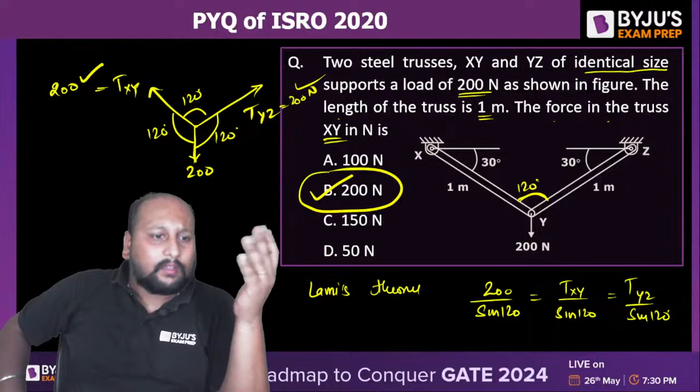Let's quickly resolve this. Let us try to resolve. Let's say I am taking theta as 45 degrees. So this will be theta, right? So if I try to draw the FBD, this is your normal reaction. Let me draw it over here for easy calculation. So this is a normal reaction, right? This will be P cos theta, this is P sin theta, right? And this is W cos theta and this is W sin theta. Now tell me, what will be the direction of friction?

That's it, last question. What will be the direction - downward or upward? Now the body is tending to slide down, so I can say the direction of friction will be upward. This is your direction of friction, that is upward.

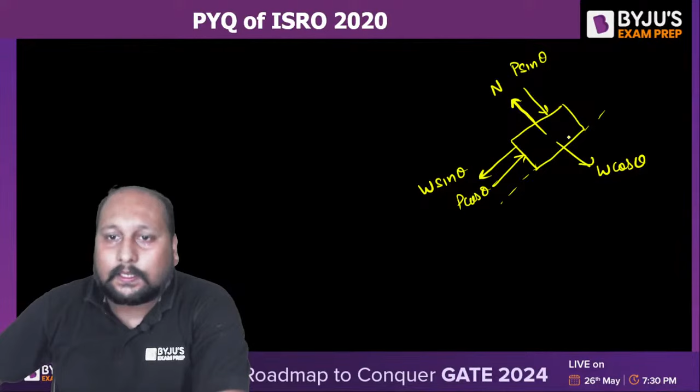Okay, so we can set the total horizontal force and vertical force equal to 0. So total vertical force equal to 0, which means normal reaction N will be equal to W cos theta plus P sin theta.

Now for total horizontal force equal to 0, we get P cos theta plus F is equal to W sin theta. Since F equals mu times N, we can write P cos theta plus mu N is equal to W sin theta, where N is W cos theta plus P sin theta.

We have to calculate the value of P. So P is equal to W sin theta minus mu W cos theta, divided by cos theta plus mu sin theta.

Okay, yes definitely. So P is equal to W times sin theta minus mu cos theta, divided by cos theta plus mu sin theta.

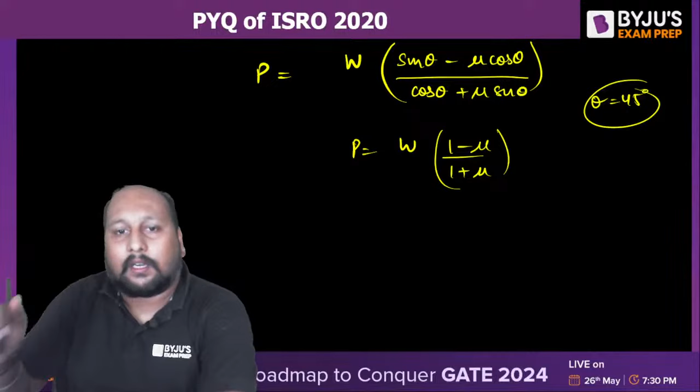Now the question becomes very easy. W is equal to 100, so we get 100 times 1 minus 0.25 divided by 1 plus 0.25, which is 100 times 0.75 divided by 1.25. This simplifies to 3 over 5, giving us 20, so 60 Newton we are getting.

Are we getting 60 Newton? Okay, so 60 Newton, option C is the correct answer. 60 Newton we are getting.

So this is the complete paper of ISRO. We have discussed in detail every single question with explanation. It's not like we just gave the answer superficially without explaining - this answer, this answer, that's it. Okay, fine, so this is it from my side.